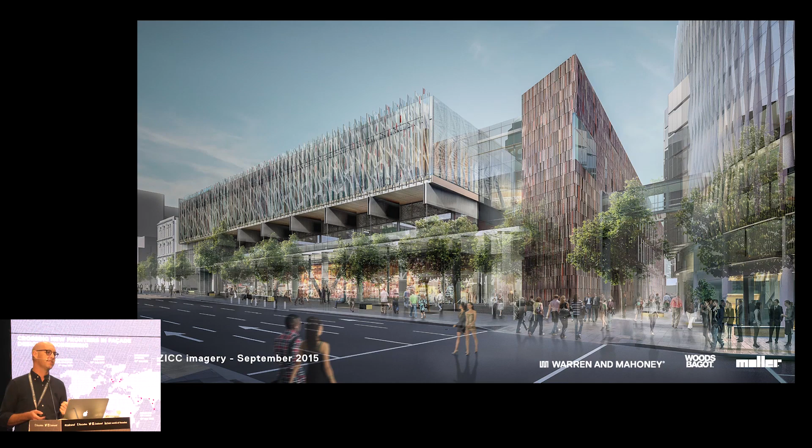Around 2015, the design team was challenged about how we could further integrate this idea of New Zealand identity into the project, and an art budget was assigned. We always envisaged that these gestures would be completely integrated into the facade of the building and would form part of its visual identity.

We're talking today about two components: what we call the spine wall, this terracotta-clad element, and the level 5 glass-clad lantern. This was a kind of placeholder image we created at the time.

We prepared a scoping document about what the art could potentially do. We were interested in how art on the building could integrate with and amplify the intent of the architecture, how it could delight and entertain, and create lasting impressions about place, experience and building identity. Our client, NZICC, summarised this as a powerful contemporary expression of Tamaki Makaurau, Auckland, and Aotearoa New Zealand's identity.

There was a great quote we looked at from Te Ara, the Encyclopedia of New Zealand, where Fiona Barker says that in New Zealand we have this strong, often emotional connection with the land, the beaches and ocean. That was a real starting point for what the art could do—something experiential about what we see, touch and experience: light, colour and texture.

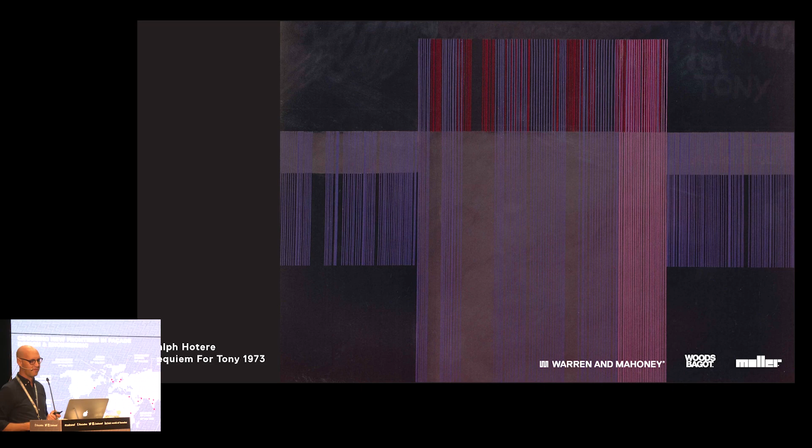Just quickly to give an outline of the massing strategy of the building and why it's shaped the way it is. A lot of convention centres, particularly overseas at the larger scale, are kind of ground scrapers. They're very large, often single-storey buildings with a nice glossy atrium and concourse out front, and a lot of service needs around the side with blank walls.

They're often on the outskirts of cities where that kind of bad urban design outcome can be inflicted. We are on a completely inner city site, bounded on four sides by good pedestrian environments, so we couldn't do that. We had to stack the building up vertically. We often talk about it as being New Zealand's tallest 3-storey building.

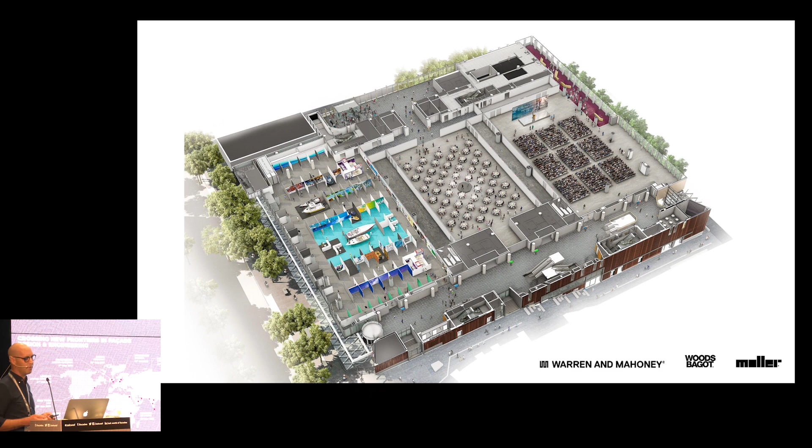The public circulation occurs on the left side, on the north, and the service circulation occurs on the right. This is an example of that ground floor Hobson Street level and how wide, open and configurable it is. But probably more importantly, this is the level 5 plenary area.

This is the space that's wrapped by the Sara Hughes artwork. It's a meeting place, it's an ideas place, where provocative thoughts are put forward, people meet, people discuss ideas. And like a large pair of lungs, delegates move out of that plenary into the spaces each side, where they have their closest experience with the city, looking through the glass and out to the environment beyond, all while looking through this art opportunity wrapped around that level of the building.

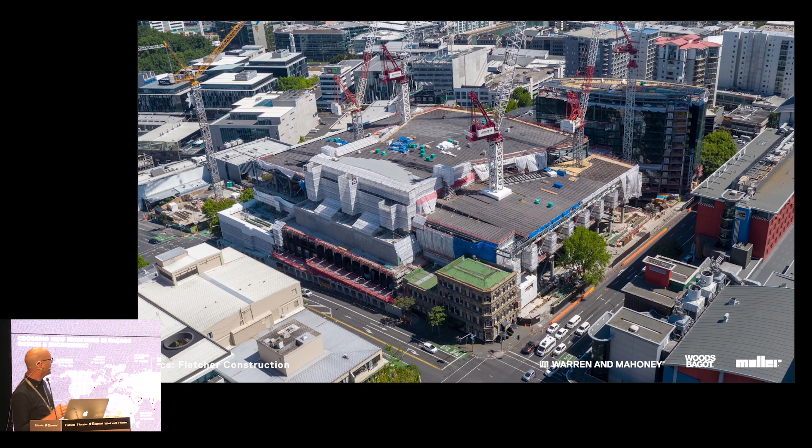Here we are now - this is the monthly drone shot that Fletcher's take, taken last month. It looks almost exactly like the drawing, so we're delighted about that. It's completely asserting itself on the skyline now. It's been a long time coming, and we're very pleased to see it taking shape there.

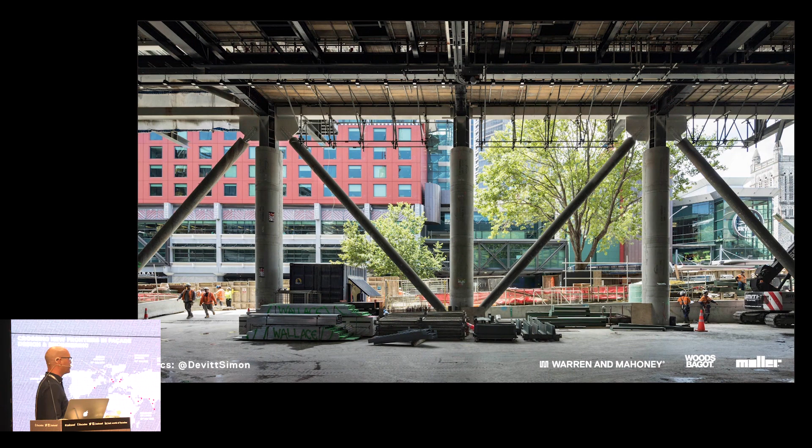In the exhibition hall, this is the view out at Hobson Street, just to get a sense of the scale and size of some of these spaces.

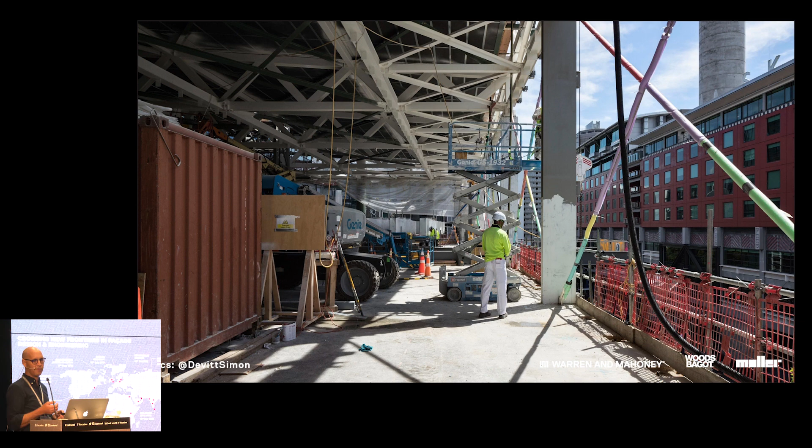But to talk more locally about where this art occurs, this is a view at level 5 taken last month, in the plenary level. This is a delegate pre-function space - the spaces outside plenary, much like where you've been just now. These are the spaces where delegates and visitors will be gathering before and after functions, on arrival, or perhaps as they're about to leave the building, and maybe leave Auckland or even New Zealand.

For many delegates, and you'll have some experience of this attending international conferences, sometimes the conference centre is perhaps your only experience of that city and of that country. So the way that the art and the building can have this ambassadorial role, or say something about what it's like to be specifically here in Tamaki Makaurau and here in New Zealand, was a very important part of the brief for what success would look like in the art.

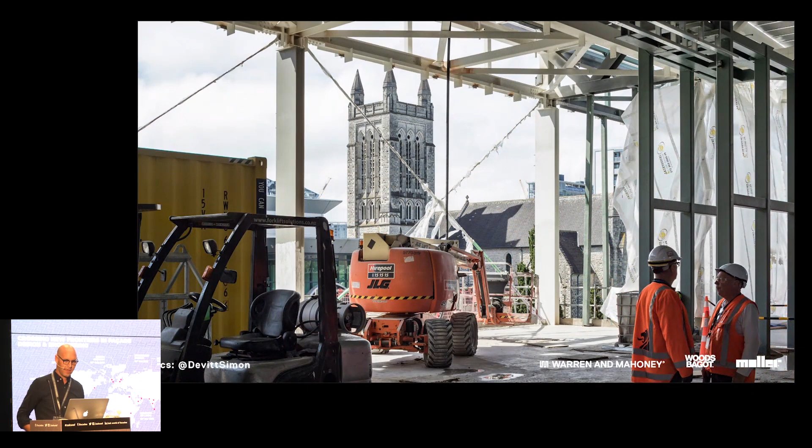The tile people have a stall outside with a couple of these heavily profiled tiles that you can see out there. They're a 250mm module, approximately 1200mm high, and there are 13,500 of them wrapping around this circulation spine.

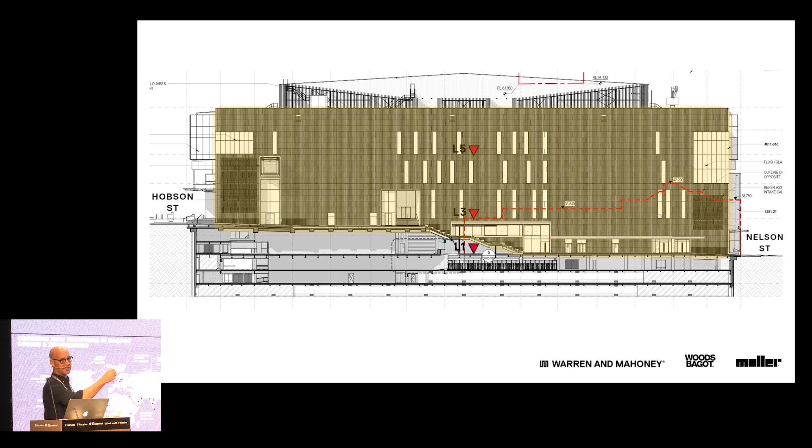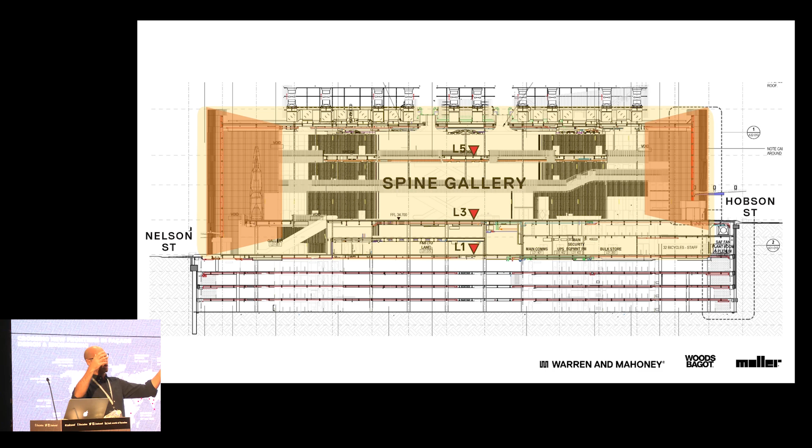And just looking from the inside of the building back at that last section, the same extent, but like a cloak or a korowai, those terracotta tiles wrap round and back inside into the building. So the art opportunity there is this surface that forms a giant sculptural element, but also runs all the way inside into the building.

Looking at a section now with the two main streets on each side, and the extents where the work by Sara sits on each side of the plenary in the pre-function space. These are the areas where delegates look out to the city, to the Waitemata, to the Waitakere Ranges, and they're looking at it through that veil.

So we were very interested in what we could provoke as an art response there that works with the view, enhances the view, and becomes a very New Zealand, local, human and real experience.

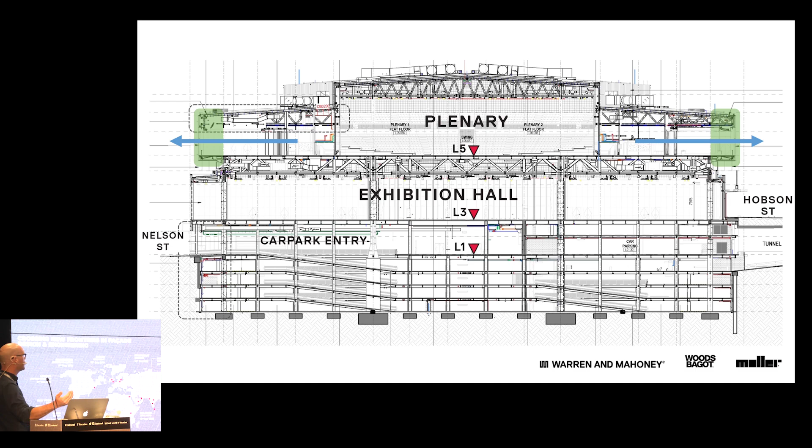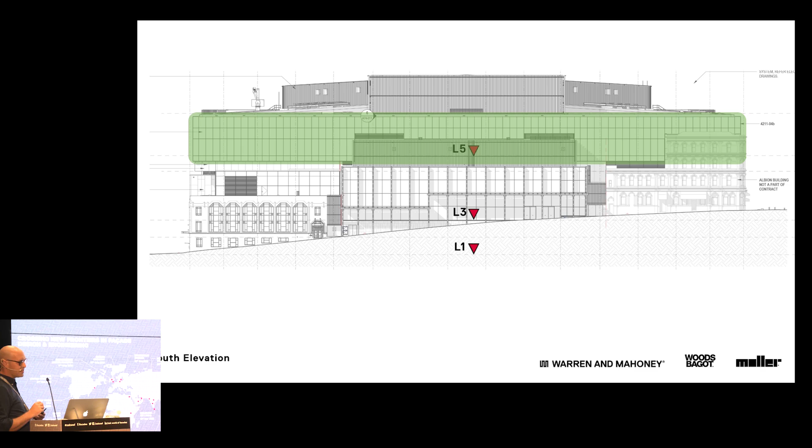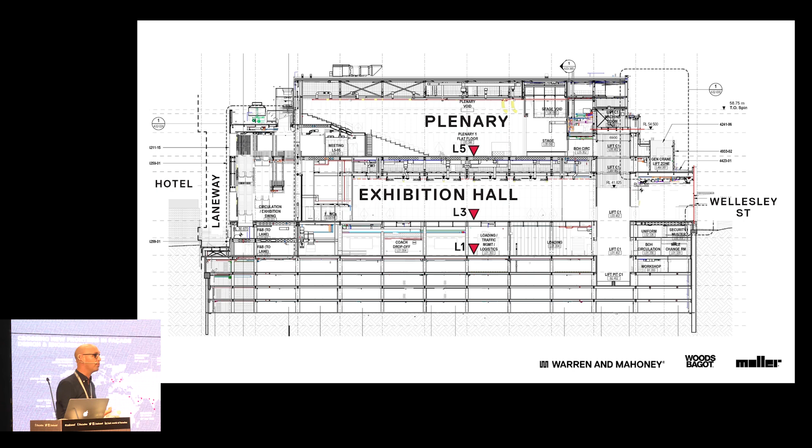You just pull the section line back towards Wellesley Street, and we can see the extent of Sara Hughes's work. You can just see the beginnings of this being installed this week. This is a counterpart to the weight and heft of the terracotta wall, and that idea of duality and contrast, and the way they complement one another, was an important part of the art brief and became important to how those artists responded.

Just lastly, you can see that heavily modelled section of the building. The terracotta sits here right against the laneway, a public open laneway, so there's opportunity for people to be up close to this, as well as the idea that the artworks are seen from several kilometres away, from the North Shore on the bridge approach and those sorts of views. And you can see Sara's work sitting down here.

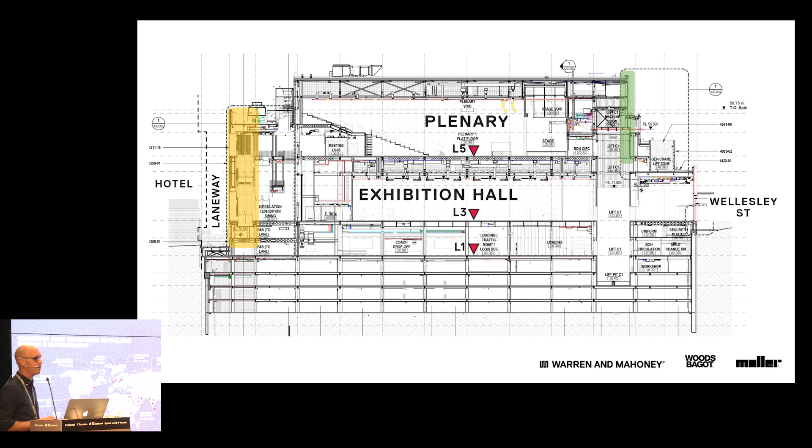We were just looking at that north wall. There are two artists working on this project. Sara Hughes is a colourist, as she'd describe herself. She's prominent, and I think you'd have seen much of her work before. She uses a lot of geometry, but her use of colour is what really distinguishes her.

So primarily a colourist, very interested in colour and boldness, but skilled in using layers, colour, storytelling, and particularly in working on big complex works at scale, which was very important on this project.

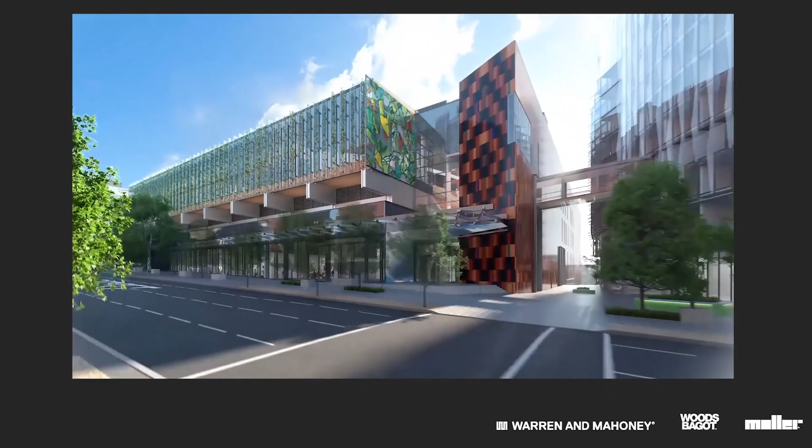Several major aspects of the building's fabric were identified as places where artists could later come in and layer their work, and the two primary areas for that were the terracotta spine wall, which stretches about 120 metres right through the entire block, and the glass shroud which surrounds the top floor, which is the plenary hall.

So for me, I suppose I was thinking about how I could enhance the architecture, how I could play with the architecture. So then I thought, okay, there is this long wall, I want to soften it.

My idea with the pattern was to make it feel like it was moving, an undulated pattern that gave a sense of three-dimensionality on that flat surface. I was already taken when the architect talked about the building being like a lighthouse that sits on top, and for me there's that feeling of being at the bottom of the forest looking up through the trees and canopy. Delegates will enter and won't forget whether they're in Australia or North America - no, they're very much in New Zealand. I think it's a good example of what we're trying to do to stand out in the international marketplace.

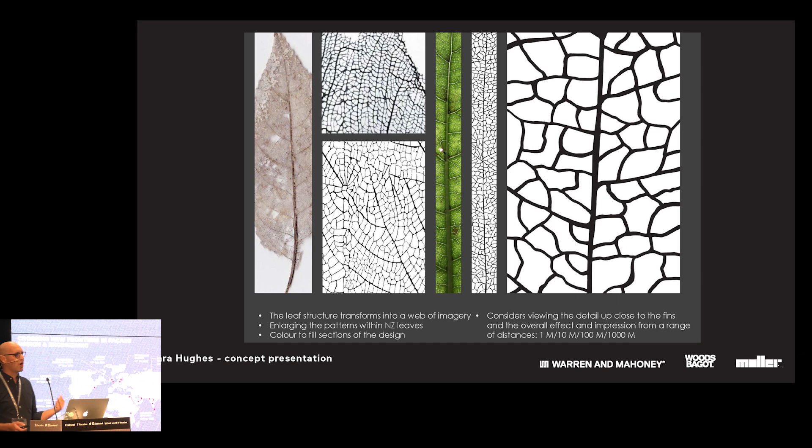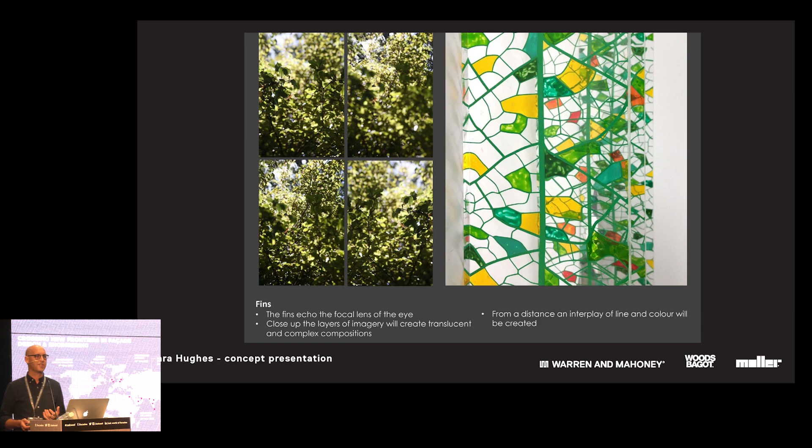Sara was very interested in the idea of the leaf, the forest, and the canopy - this is their work which I'm speaking on behalf of, some of their concept work. She drew on her childhood in the far north, collecting leaves and watching how they change through the year, which led to a wider look at the range of colour and texture found in the New Zealand landscape. The idea of protecting and preserving those elements and sharing them with visitors was very consistent with other design objectives for the centre, particularly visitor and customer experience, and the ideas of kaitiakitanga and manaakitanga - guardianship and hosting.

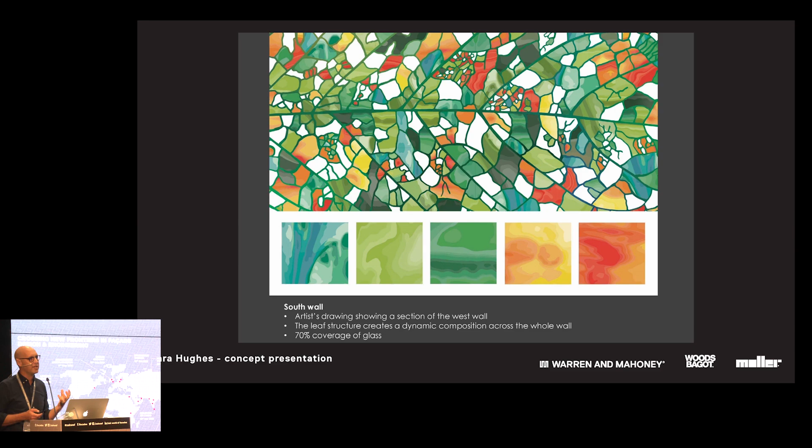To cut a much longer story short, this leaf motif was developed for her work on both the fins and the south wall - ideas of endless pattern making and colour that evoke what we see in our landscape, and the way it can change and shift in different lighting and weather conditions.

All of this has to be documented, and as architects we don't make recipes, we make blueprints - we put exactly where everything in the building is supposed to be with great millimetre accuracy. There are some interesting differences in the way Sara described her work for the building process compared to how Peata described hers.

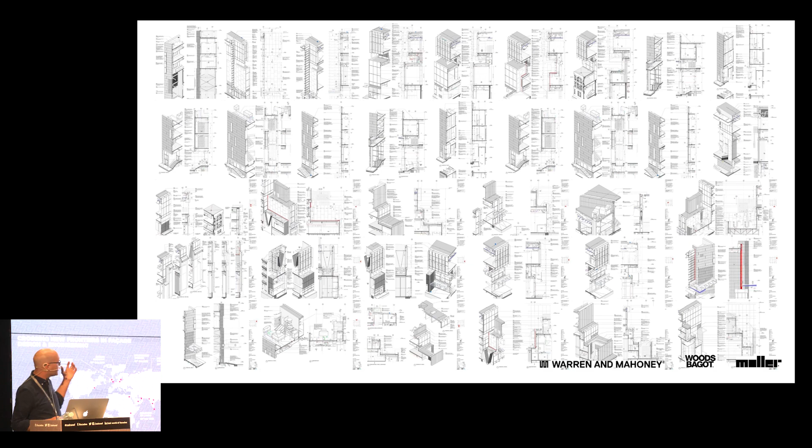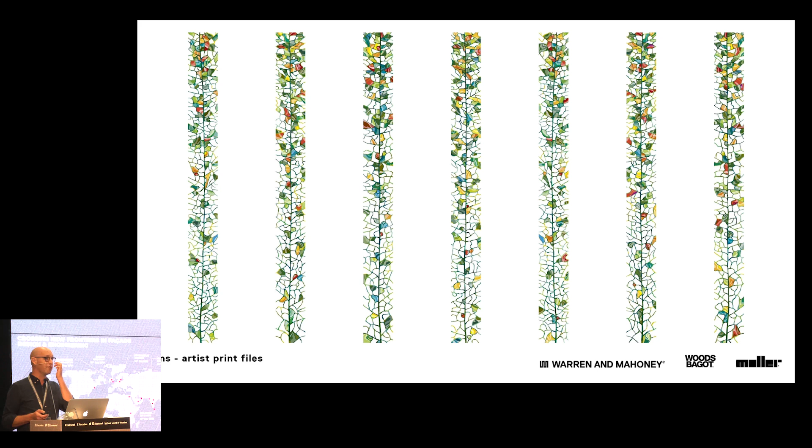For example, these are 7 different pattern types, of which there are 49 fins running down the east facade of the building that have just been installed. It's a print process onto the glass using 60 different colours, and these have to be provided as a high-res digital vector file so it can be printed onto the glass.

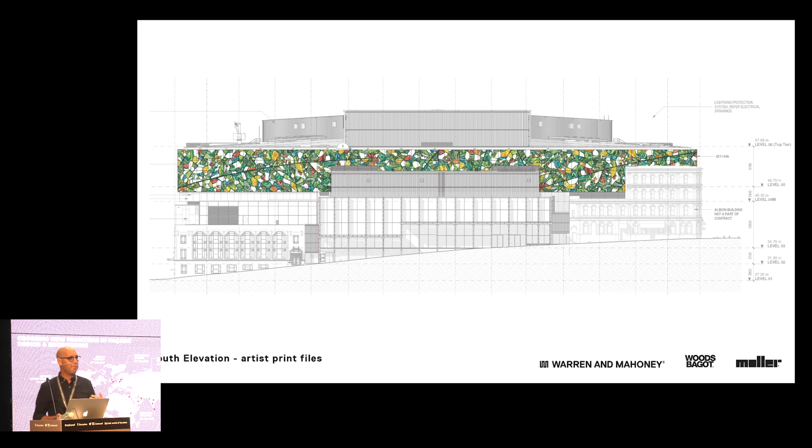Her south wall panel here consists of 230 unique panels - every pattern is different and printed uniquely. They're all completely backpanned except for a small vision panel on the side, and backlit with colour-change LED, with provision to get in and change that material through the mullions. A very significant piece of work - here's a view of it from the City Works depot.

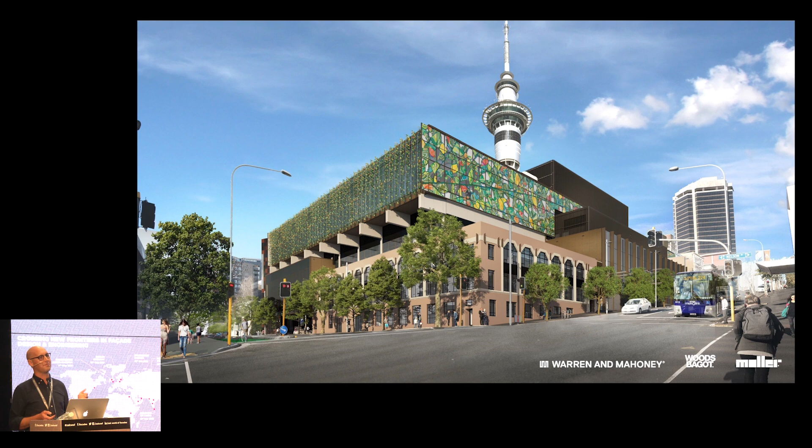A particularly important characteristic for Sara and for us is how that building will change in different light and weather. It's interesting how often it leads to discussions about how 'grammable' this is - these questions come into architecture discussions increasingly more. What's the Instagram moment? Is this the shareable view of the building? It's amazing how often this now comes into conversations.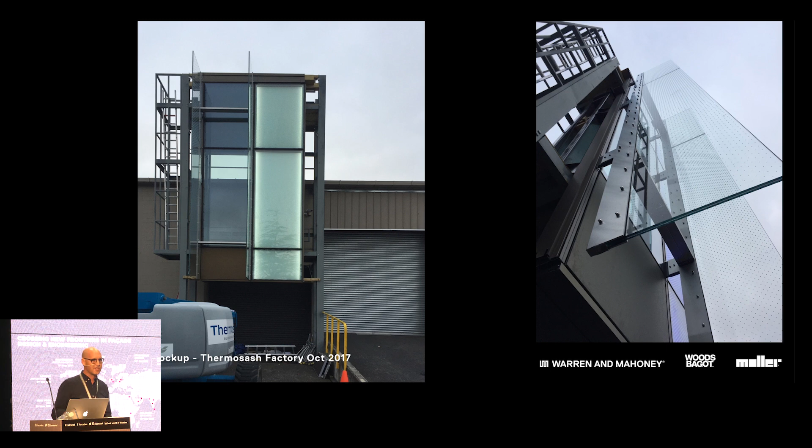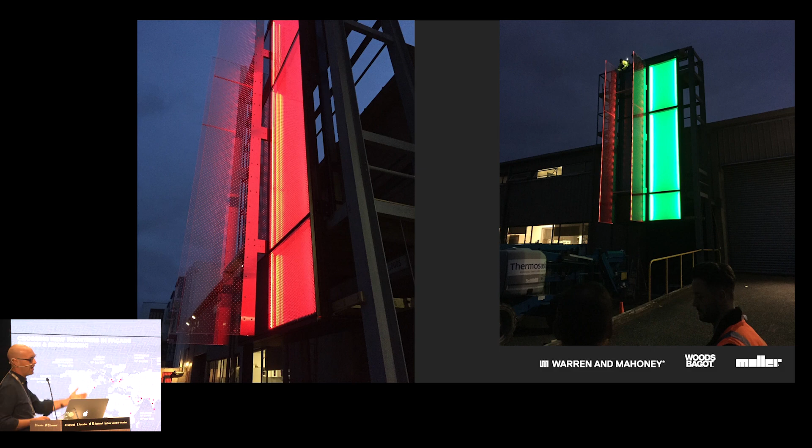Full-size mock-ups are a really important part of getting this right, both to investigate assembly, weathering, sequencing, how different facade units and types come together, but also how to test the lighting and how that effect will work. There's investigations here about how to get the evenness along the back pan, how to tune those, and that tuning will continue to happen as they're installed to, if nothing else, comply with resource consent conditions and all sorts of other exciting things.

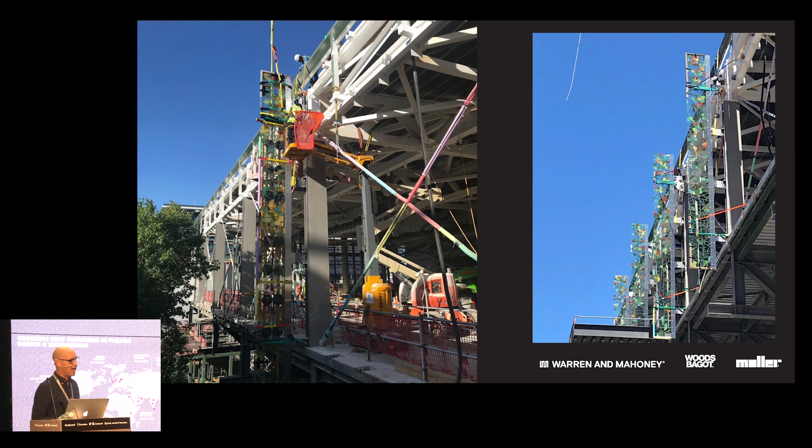A couple of weeks ago, the first of these pieces was installed on the 8th of February. They're now running all the way down that edge. After spending several years telling the story of the building, we really are delighted to see it actually starting to speak for itself.

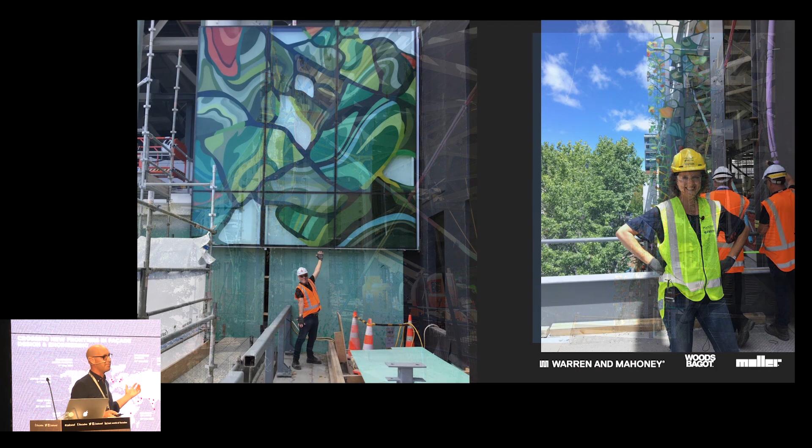Seeing Sara's work go in here is a really big moment. These are the sorts of images that make us very, very happy. On the left, we've got a very, very happy builder. On the right, we've got a very, very happy artist. These are things that delight us and make us very proud.

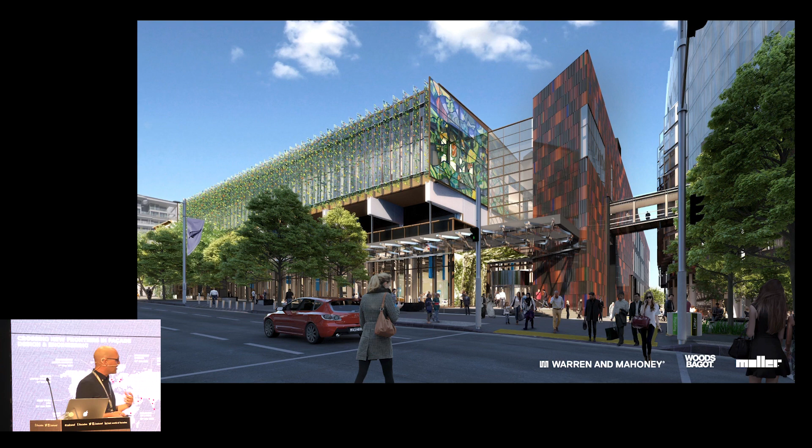To quickly talk about Peata's work on the spine wall, this idea of weight was used to mark the laneway, which moves across down the right side of the page there and connects Hobson and Nelson Street. It also contrasts the lightness of Sara's work. The terracotta sits on this regular 250mm grid, so it basically presents like a weaving loom or a matrix on which you can investigate pattern making.

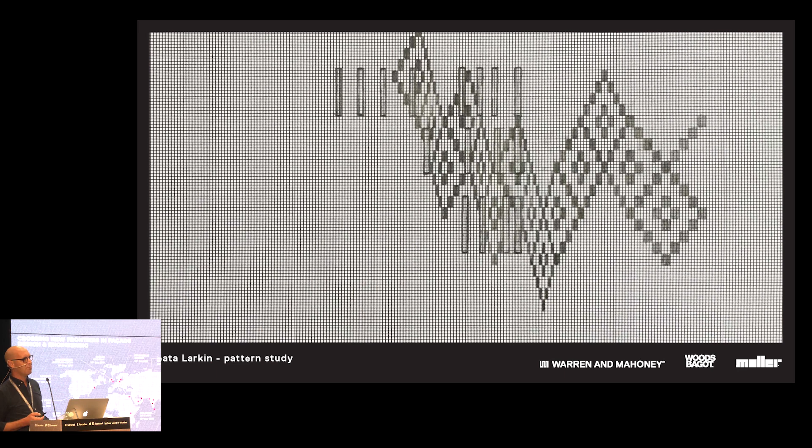This is just a pattern study she was doing during design, and you heard her speak in the video about how she was interested in softening and undulating the pattern. So she worked up a pattern that would read both at scale, but would also be something interesting and exciting to experience up close and at ground level.

Investigating the colour and the process of confirming this on the tiles was another visit to the factory in Spain in the middle of 2017, looking at the glazing and the firing processes, understanding how colour and texture move through those processes so that she could land on the final set of 8 colours.

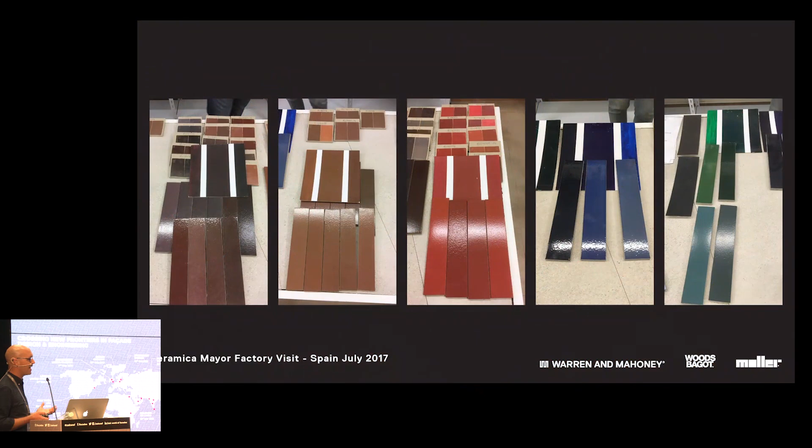She's got 6 base colours in here and 2 accent colours, and a really wonderful kind of richness of texture in here, which was important for when we were up close to that piece of work.

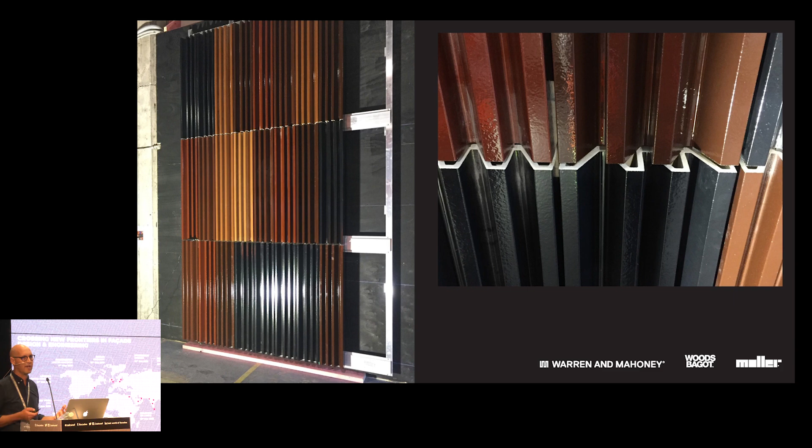Mock-ups, as always, important - an 8x3 bay here to investigate how the joints appear, how the bracketry system works, how it sits over the cavity, and of course the appearance and scale and how these things move in different light.

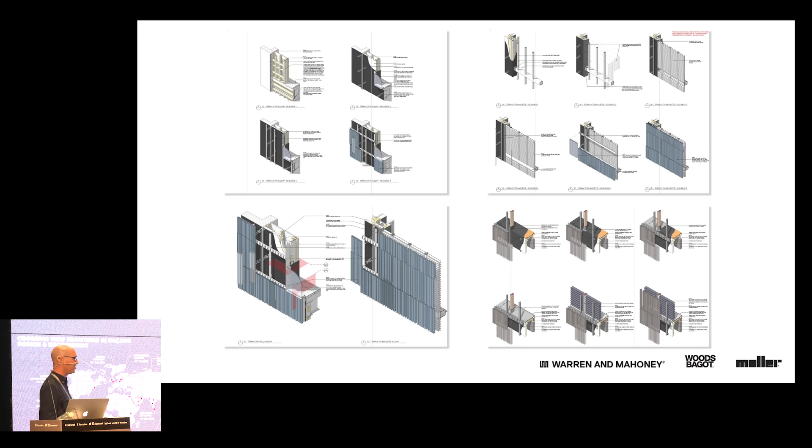So, back to us, we throw together our drawings, we say where everything goes, we use fundamentally conventional drawing processes to do that. We can use a bit of 3D because that's a little easier nowadays.

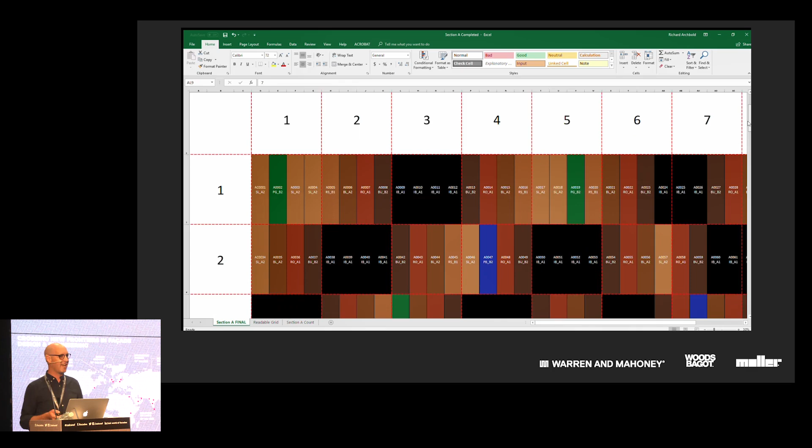But what I really love about what Peata did to document her work is she actually made this massive Excel spreadsheet and listed out all 13,500 tiles in Excel, coding the profile type, the colour and the orientation, and itemised every single one of those to push into her shop drawing process.

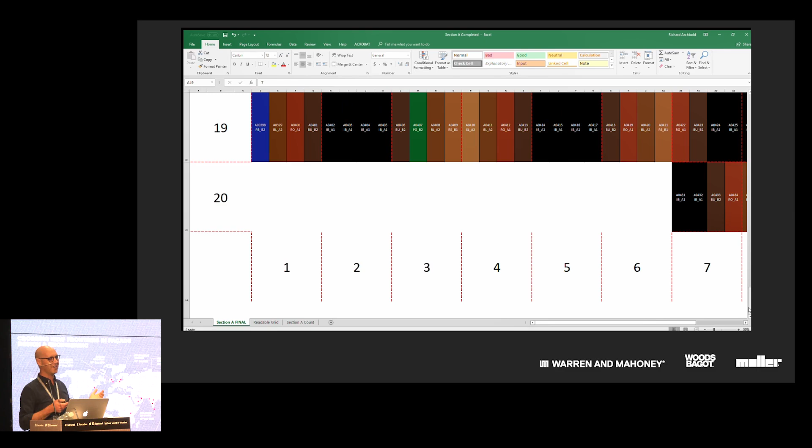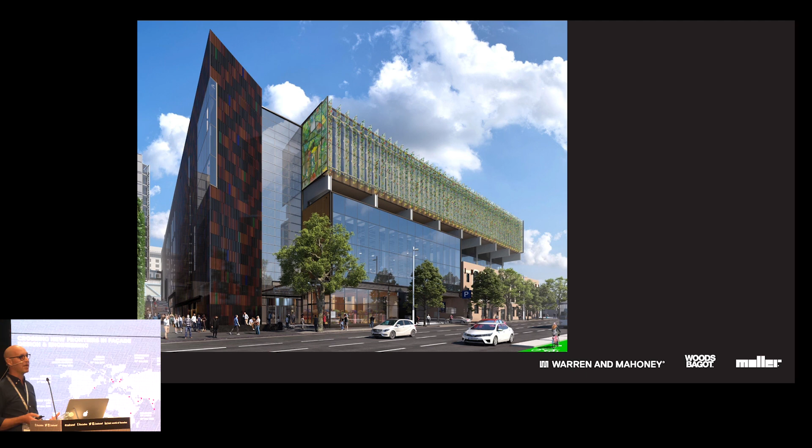I think what's evident here is just the strength of those two pieces of work. These are two of the largest public pieces of art in New Zealand. There's this magnificent interplay of weight and lightness between them.

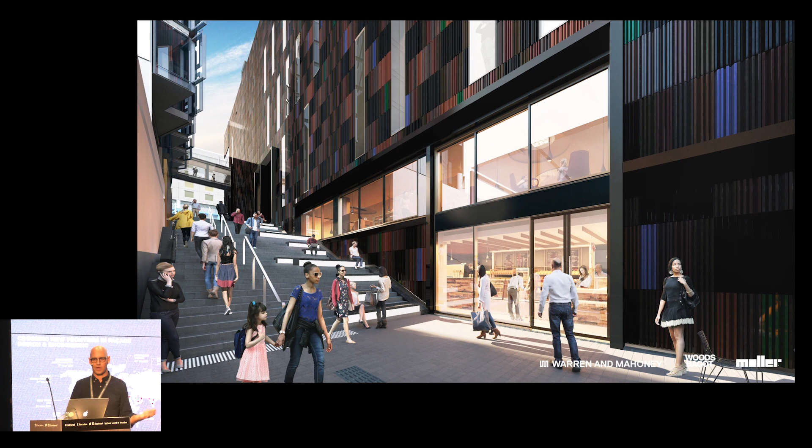And, you know, at the ground level in the laneway, as a view of how Peata's work will come to ground, there's a range of texture and colour and brightness and boldness that is very rarely seen in the CBD.

We're hoping to see Peata's work installed around the middle of the year. So while Sara's work is really starting to speak for itself, we're looking forward to Peata's work very shortly telling its own tale. Thank you very much.